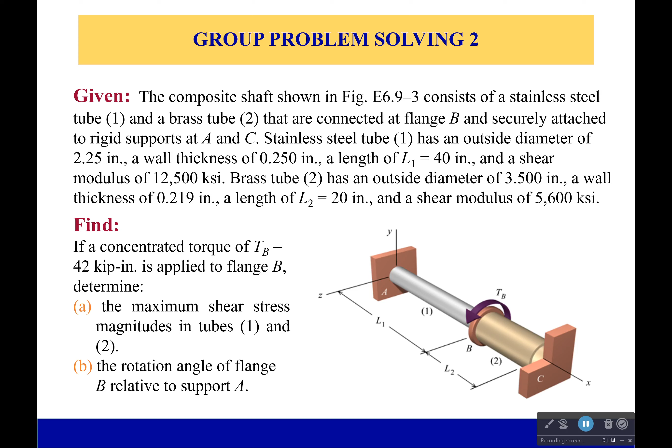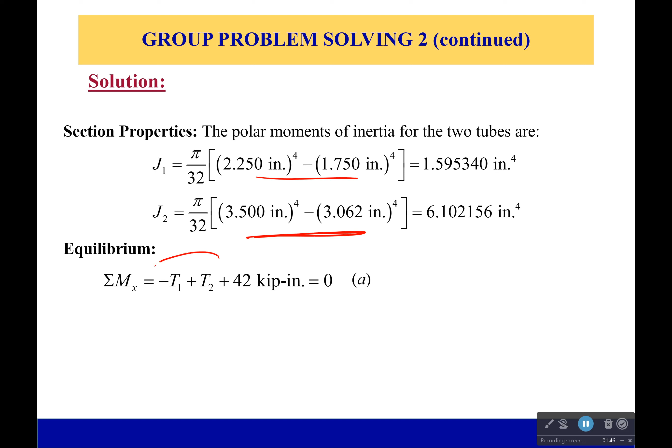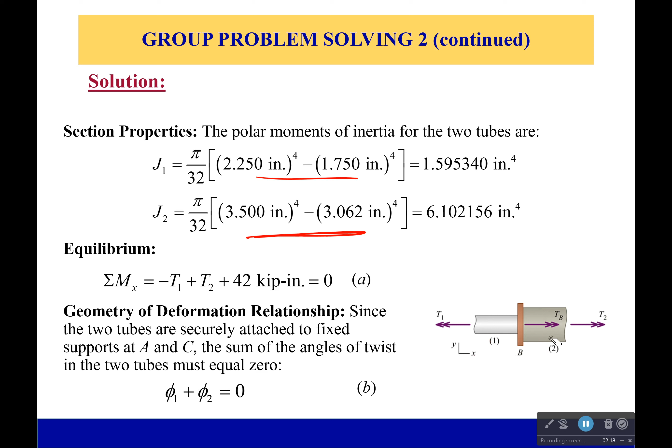Then we write our equilibrium equations, which we can't solve yet because we've got two unknowns. We only have one equation. So we have to look at our geometry to figure out what's going on here. And what we should realize is that the angle of twist for section 1 and the angle of twist for section 2 have to be the same at point B. Because one's going to twist in a positive direction, and one's going to twist in the negative direction to go back to 0, because it starts at 0 and it ends at 0 because these are rigid supports. So when we add those two angles of twist together, they have to be equal to 0.

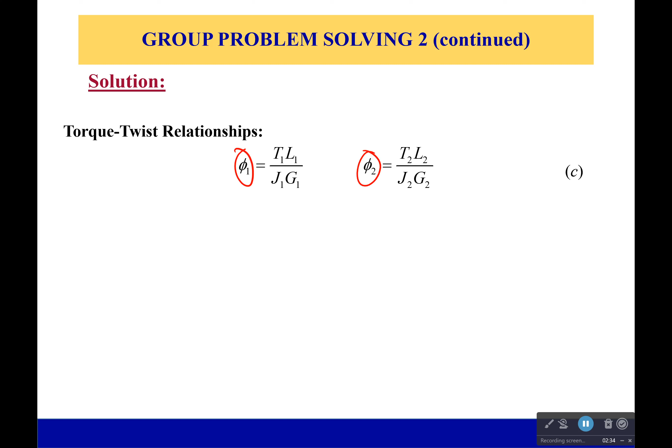So now let's develop our torque-twist relationships. We know everything in here except for the torque. And we also know that when we add these two together, they're going to equal 0. So one is going to be equal to the negative of the other. And so we can develop our compatibility equations. Now, with our original equation of equilibrium, we have two equations, two unknowns, and we can solve.

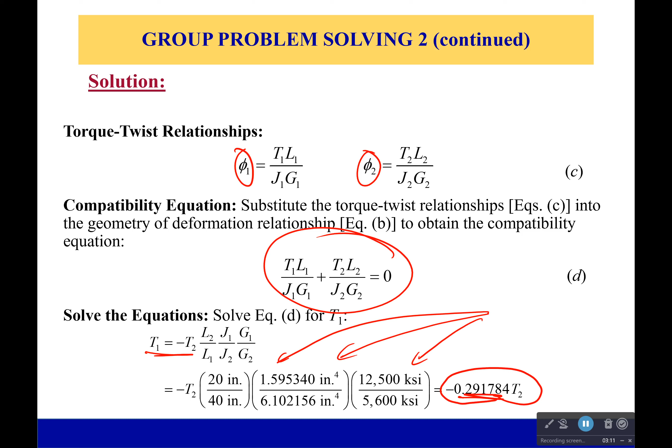Now, if you want to, you can do what it normally does in these problems, which is solve for T1 in terms of T2 and get it all like this. You can also just plug in all your numbers. There's lots of different ways you could do this. If you want to use a matrix, you can do that. I do find this method to be very helpful. It's just there's also the chance of having some horrible calculator error if you're not careful. So be very careful. Double check yourself. Make sure you don't make that mistake.

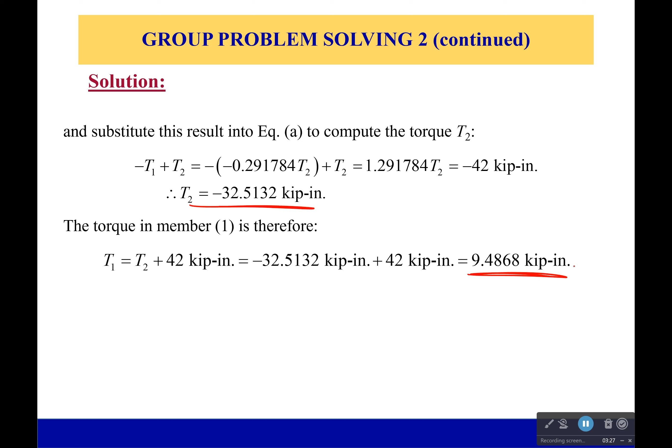Now, using that, I can plug it all back into my original equation of equilibrium. I solve for torque 2, and then solve for torque 1. Now, I know what torque 2 is, I know what torque 1 is, and using my elastic torsion formula, I can calculate the maximum shear stress, because that's simply equal to the torque times the radius over the polar moment of inertia. So I do that for stainless steel, and I do that for aluminum.

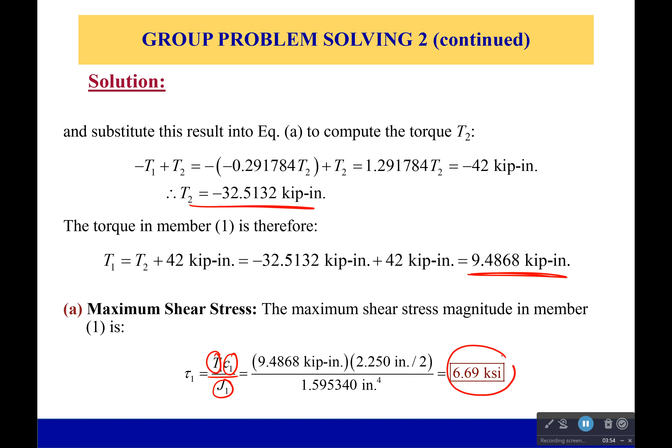One has a shear stress of 6.69 KSI, another one has a shear stress of 9.32 KSI. I said stainless steel and aluminum; stainless steel and brass. In this case, the stainless steel actually had less stress because it was hollow too. It had a fairly comparable polar moment of inertia.

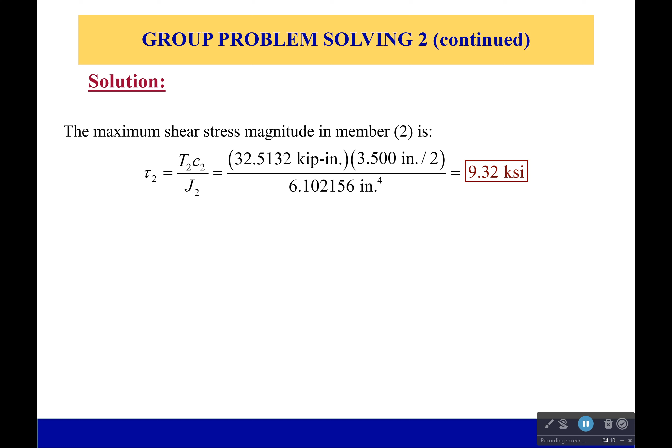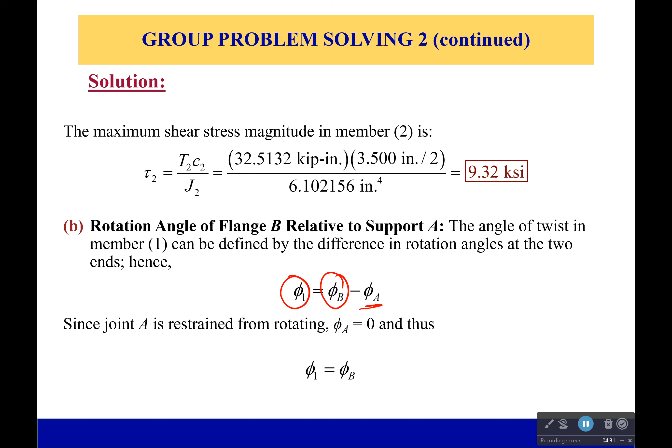Now we have to figure out what the rotation angle of B relative to support A is. Well, we know that section 1 is going to be equal to the rotation angle of B with respect to A. And since we're going to say that A is equal to 0 because it's held at a joint that's restrained from rotating, then my rotation angle in the first section will simply be equal to the rotation angle of B. And so that would come out to be 0.01903 radians.

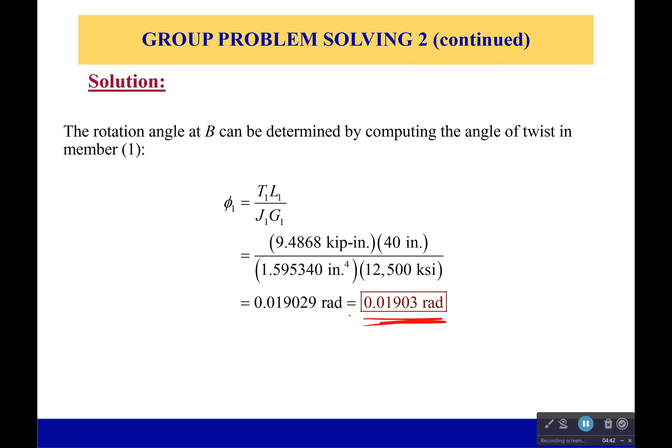If you struggle with any of those steps, make sure you go back through and you can pause and take a longer time. I know writing down the numbers takes a lot longer than me talking about them.